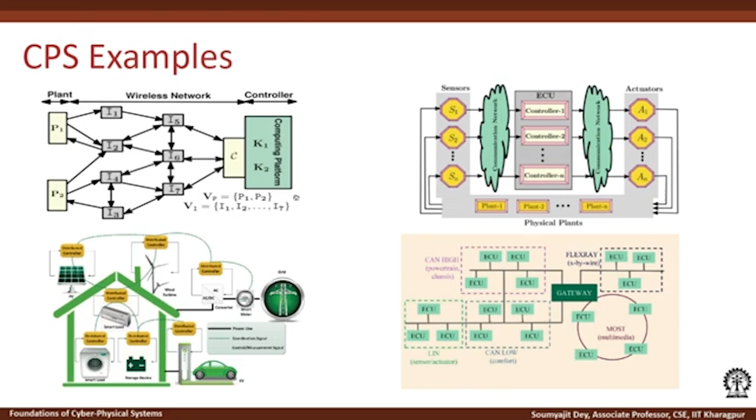So, if you remember from our earlier lectures, we have talked about several cyber physical system examples, and in all of these examples we are talking about how some controller is going to control some plants through a cyber physical infrastructure. So, we will be touching upon these concepts of mathematical control theory which are required for a student to learn in case they want to model such dynamical systems at a theoretical level, to understand what is meant by stability of systems and how to do some basic control design.

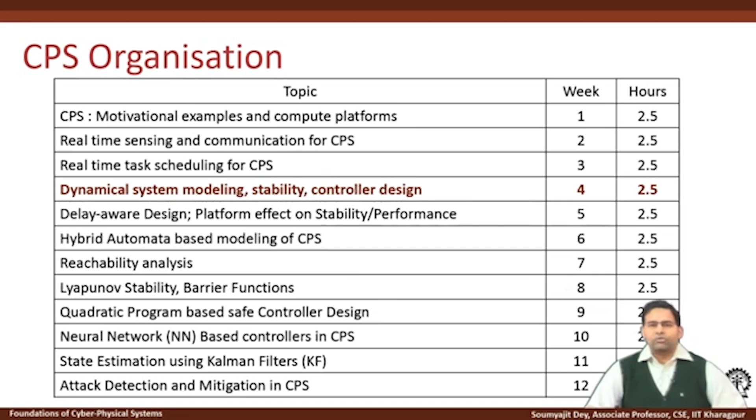So, we will be starting with how to model continuous dynamical systems, systems for which we expect that with the time continuum there exists some evolution, and how to control such systems. I will just repeat that this is a very deeply studied topic of basic control engineering, which we will be covering at a high level. We will be touching upon the basics, so that it arms you with the artifacts of control theory which are required for modeling and controlling cyber physical systems.

And as you can understand, the basic idea in this course is to use such theoretical primitives in a more practical sense, how to make them mappable to processor architectures and network infrastructures and make some good use of them.

So, we will again study from these introductory parts what we really mean by a cyber physical system. Essentially we are talking about an integration of computation along with physical processes, and that is primarily what most embedded computers do. That means very low power, small form factor computing chips which may be ubiquitous, embedded inside some other network fabric, and which are tasked with monitoring a physical plant and providing it with suitable control messages.

The idea, as we have discussed earlier also, is that such compute platforms will be executing these control algorithms, and they are going to execute in the loop with this cyber physical plant. What we will be talking about here is how to model these kinds of plants mathematically, and how to design a control algorithm for which in future we will be writing some programs and scheduling and mapping them to an onboard system. So, we will be talking about the mathematical parts here, like modeling the plant and creating a basic controller which is going to control the plant, that is all.

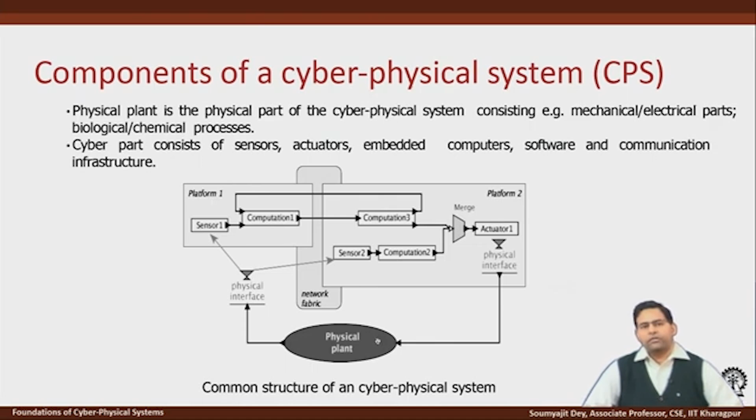So, like we discussed, a cyber physical system has got various components, and inside this big fabric we have sensors, we have actuators, we have computation. When we are starting to do a design, the first step would be how you model this plant using a set of equations.

Let's start with one of the very basic examples, that is a cruise control system. As we all know, cruise control is a standard example, and it can be found in many modern vehicles. A cruise controller's task is to maintain a constant vehicle speed, and why is that a difficult task? Because the vehicle may suffer from external disturbances such as drag resistance, which will happen due to changes in wind, or changes in road condition, which will affect the friction this vehicle faces on the road, etc.

So, a cruise controller is going to control the speed of the vehicle, and the way it will do that is it will measure the vehicle speed at run time and compare that with the reference speed, and accordingly it is going to decide whether to increase or decrease the throttle input.

Okay. So, let us say here we have a simple vehicular model. It is taken from this website, ctms.engin.umich.edu. If you go to this website, you will see a lot of examples of such dynamical systems and how to design basic controllers. We are just taking an example from there.

So, let us say you have a vehicle with mass m, and let us say u is the control force which is acting on it, and let us think how this control force is going to be generated. The driver is going to press the accelerator or the throttle, and that will generate a torque request to the engine, and accordingly the engine powertrain, in order to meet that torque request, will do some actuations, and due to that the torque being pushed on the wheels of the vehicle will get affected, and accordingly the vehicle speed will increase or decrease.

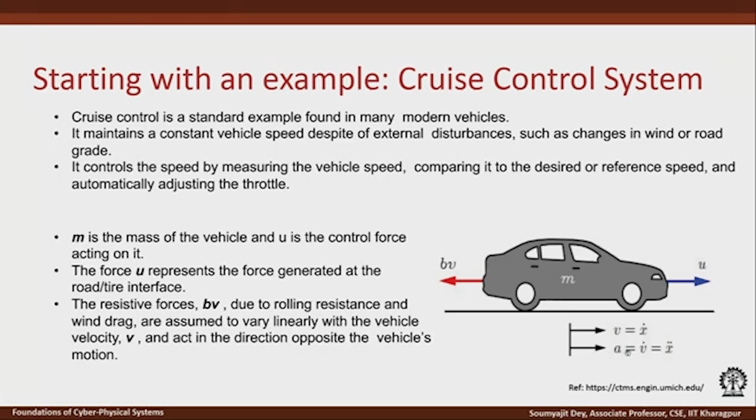Now, in order to analyze this vehicle, we will need to figure out which are the variables that we need to talk about. So, of course, the net force will create an acceleration, which will create a velocity, and that will create a change in the position of the vehicle. So, let the position of the vehicle be denoted by x. So, v is x dot and a is the acceleration, which is v dot equal to x double dot, that is the second derivative of the position x.

Okay. So, now if we apply standard equations of motion and sum them up in the x direction, we will arrive at something like this. That is the net force acting on the vehicle in a forward direction, which is m v dot should be equal to u minus b v, right. So, you have this equation here, and what we are interested in is to control the speed of the vehicle, but let us understand what the controller is going to measure.

So, typically for a vehicle, like we have discussed earlier during our lectures on sensors and actuators, we measure a vehicle's velocity using some Hall effect sensors, right. So, the output equation in this case should be y, which is the measurement variable, equal to v, right. So, these are the two equations which model the dynamics of the system, and typically for most CPS systems we can create such a set of equations, which may be very complex based on the complexity of the CPS itself, right.

And what we are tasked here to do is design controllers such that this dynamical system can provide us with some desired performance. So, if we try to give a formal definition, what is a dynamical system? It is a system that will change over time according to a set of fixed rules. Now, some of those rules may also be time variant in some cases, we will come to those things. And what this dynamical system model determines is how the state of the system changes with respect to time.

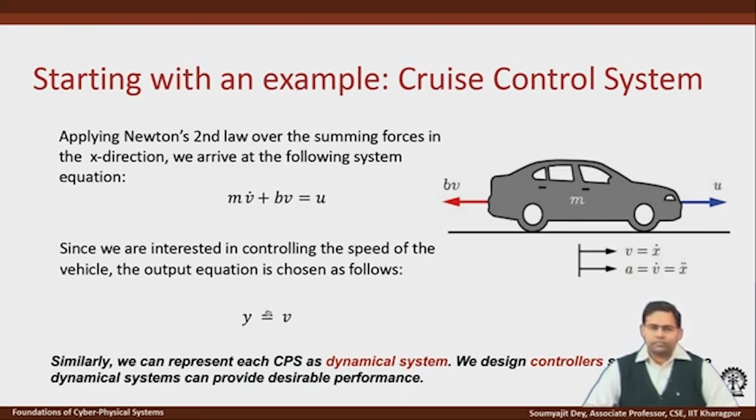And the other important part is using this set of dynamical equations or differential equations that I can write, which express the interrelation of the state variables and the output variable, we will try to create a functional form which represents how these state variables change their values over time. So, once I do that, what I have is a function that tells me, given the current state, what will be the state of the system in a future instant of time. So, that is basically a function which gives me the rate of change of the state vector. So, this is the most important part of dynamical system modeling.

We have to identify what is the state vector, what are the variables of interest, and this is the minimum set of variables that I must model, because if I do not use that set of variables and eliminate any one of them, then maybe I will be missing some property of interest for this dynamical system, or maybe I will not be able to model how some of the other variables which I am already considering are going to change their values, their functional relationships.

Okay. So, in this way we will try to figure out what is my state vector, and then we will try to figure out what is this function that tells me, given this state vector at t, what is the value of this state vector at any future time point t prime. So, that is what this function, which we call a flow function, will actually tell me.

So, typically when we are talking about dynamical system modeling, we will be saying that the state vector is given by some x(t), and let us say there are n variables of interest which are these vector components, and they are x1(t), x2(t) up to xn(t). So, for any state determined system, from the knowledge of these state variables at initial time t0 and the system inputs, that means the values of u here, right, what is the value of u that I am giving? If these are provided to you, you should be able to figure out the value of these state variables at some future time point, right.

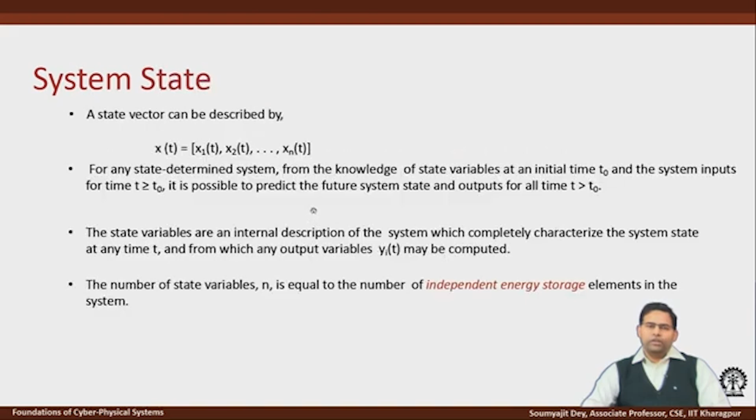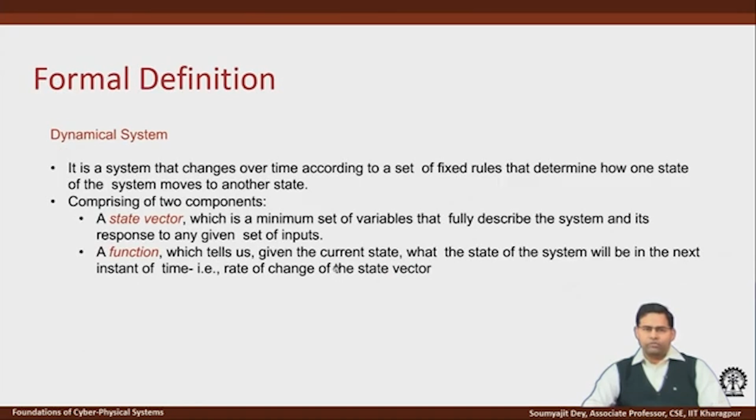So, now once we understand that, we need to identify a set of state variables and we need to compute a set of functions. As you can see from these vehicular equations here, it is clear which should be my state variables and what should be the functions. We will again come back to that through some real examples.

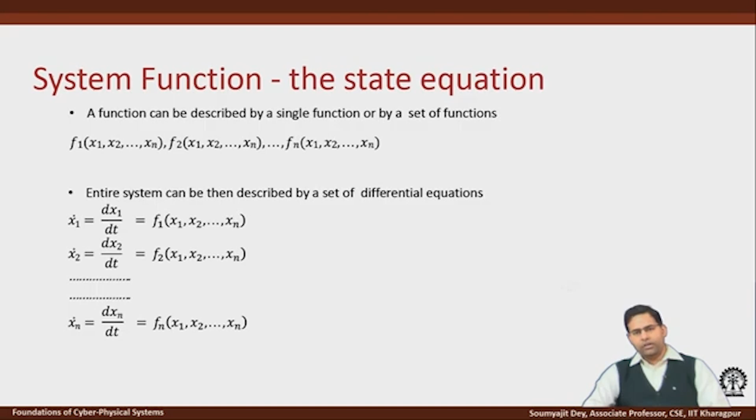So, at a high level we need to figure out what are these x's, x1 to xn, for any CPS system that is given to you, and you need to identify what are these functions f1, f2 up to fn. Once we have identified this set of functions and this set of variables on which the functions are defined, we have a dynamical model of the system. So, now if I want to classify these dynamical systems, it all means what are the different functional forms I am assuming here.

So, the system may be linear or non-linear based on the functions being linear or non-linear. The system may be autonomous or non-autonomous based on whether the system requires an explicit input or not. The system may be conservative or non-conservative. It can even be a dissipative system which continuously dissipates energy. The system may be discrete or continuous by the model.

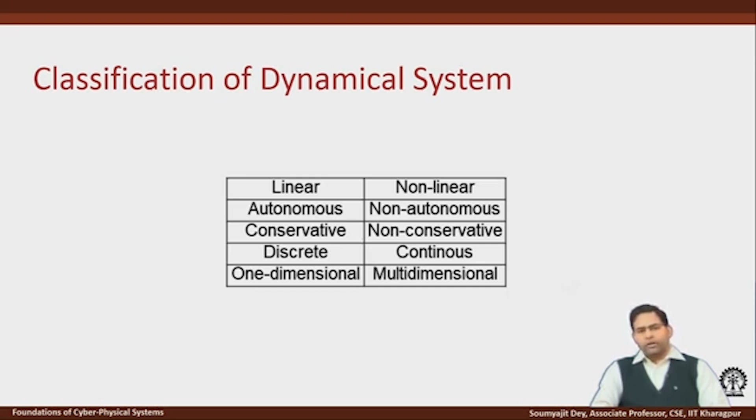That means, the model is such that it only tells you the value of the variables at certain time instants, let us say t equal to kh, k being an integer and h being a period of the system. So, then I am only interested in the values of the variables at those discrete time points. Also, the system may have multiple state variables, it may be multidimensional, or it may be a one-dimensional simple system.

So, just to understand when we call them a linear system and non-linear system. It is basically whether the functional form we talked about is linear or non-linear, and by definition we know that if a function is linear, it should satisfy relations like additivity and homogeneity, where alpha is a constant. So, for example, f(x) equal to 3x, f(y) equal to 3y, these are linear functions.

And when the given functional form is by mathematical definition a non-linear function, that means I cannot express it as a line in a multidimensional coordinate system, then I will say that it is a non-linear function. For example, if you look at their geometric interpretations, these are not linear functions here.

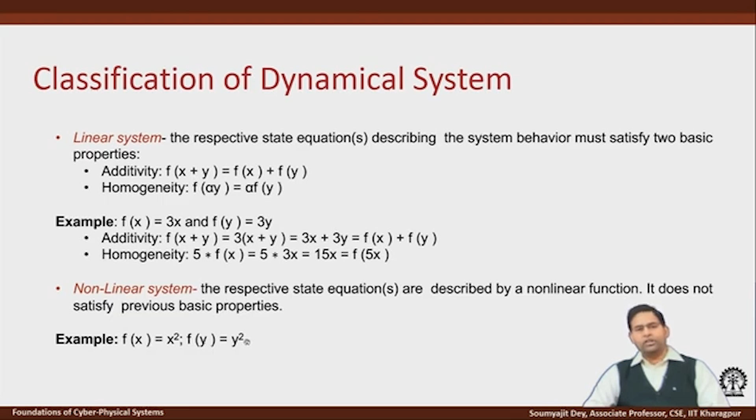Now, coming to autonomous systems, an autonomous system is again a system of ODEs or ordinary differential equations, and they do not depend on the independent variables. There is no extraneous independent input. All the inputs that are there are already part of the model, and if the independent variable in this case is time, then we call it a time invariant system.

So, by definition, when I say that a system is time invariant, that only means that if I shift the input in time, the system's output will also only shift in time, and otherwise it will remain exactly the same. For example, let us take some examples here. Let us say you take y equal to 10 x(t). So, that is the system equation, and let us say you delay the input.